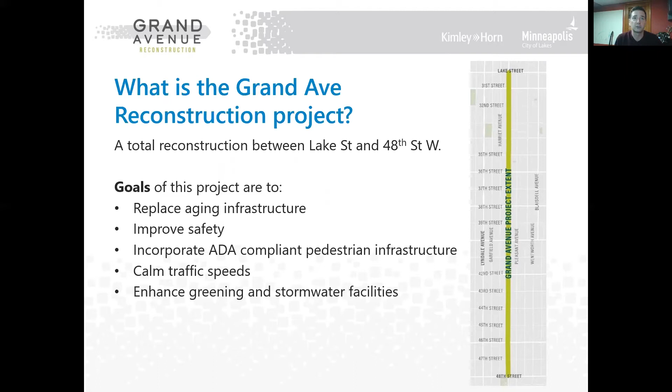But while we're there, we're hoping we can make Grand Avenue safer for all users. That means incorporating better sidewalks, better curb ramps to make the corridor easy to use for everybody, better managing traffic speeds. In addition, we're looking at what we can do to enhance greening, get more plantings out there, and better manage stormwater infrastructure.

So here you can see a project timeline. We're in spring 2020, right in the middle of the process, where we've gone through a couple of rounds of engagement. We've done some technical analysis, and now we're working on coming up with a recommended design layout. Footnote here is that our recommendation for our final layout has been postponed due to the COVID-19 crisis.

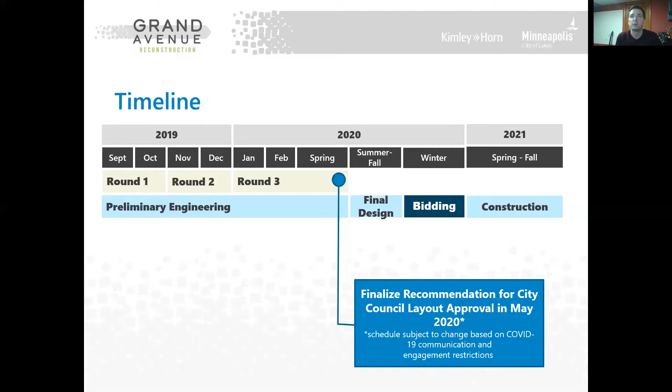The project is going to stay flexible during this time and make sure that we're allowing folks to comment and that people's voices are heard throughout this project. That said, the tentative project schedule is to move forward with final design in the summer, fall of 2020, moving towards construction in spring of 2021.

We've done some business meetings. We've met with some of the neighborhoods. We've done some stakeholder engagement with tables at community events. And we've had 2 rounds of public open houses that have happened so far.

What we're hearing is that multimodal safety and usability is really important. So that means not just the ability to drive along the corridor and park, but also the ability to ride the bus, the ability to walk safely and comfortably, and to ride a bike.

We're also hearing about the desire for more green space, more plantings, and better stormwater infrastructure along the corridor. And then finally, one of the key themes we're hearing is people don't want to expand the roadway. They want to stay within the existing right-of-way as much as we can.

So a little bit more on right-of-way. The point of this slide is to illustrate that today, the existing width of the street, from the outside of the sidewalk on one side, all the way across the street to the outside of the sidewalk on the other side, is 54 feet.

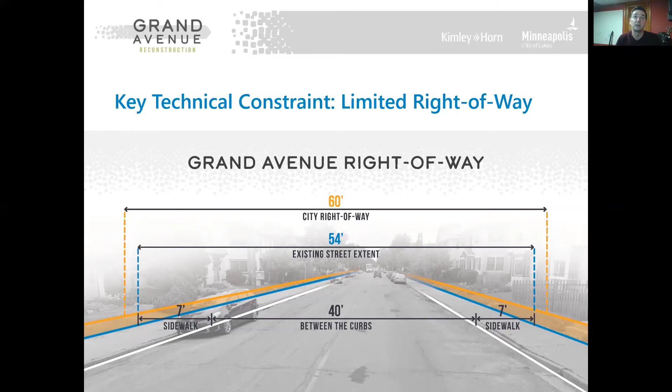Things like Access Minneapolis, the city's transportation plan, which guides implementation of transportation infrastructure and programs throughout the city. Vision Zero, an effort to reduce traffic incidents and crashes and get to zero traffic deaths. And complete street policy, which encourages consideration of all users on corridors that are up for reconstruction.

So what are some of the design elements we're considering for Grand Avenue? This slide will be hard to read on your screen, but that's okay because we're going to touch each of these squares in the table individually in the next several slides. On the top of this table you can see some of the design elements we're going to talk about next.

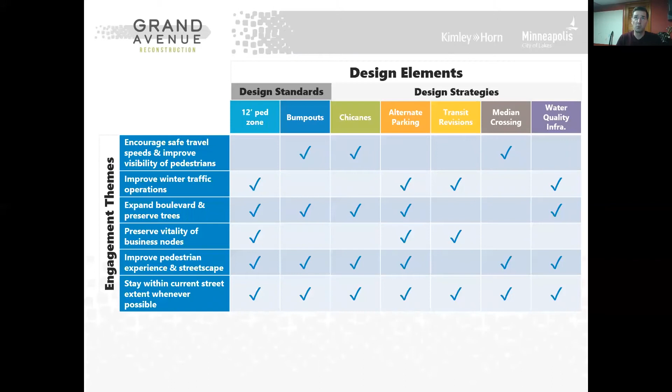On the side of the table, the row headings are the project goals and key engagement themes we're hearing from stakeholders. We really tried to make sure the design elements we're proposing solve some of the issues along the corridor. So with that, we're going to take some of these one by one and talk about them.

The first point to make in this project is that what's there today doesn't even meet our minimum standard for a pedestrian zone. In many cases there's a 6-foot sidewalk or even less with no boulevard today, so you've got a sidewalk, then a curb, and then the parking lane and moving cars right next to that curb. It's not even the minimum standard for a pedestrian zone.

So the first thing we're considering is bringing the corridor up to that minimum standard for the pedestrian zone, which includes a 6-foot wide sidewalk as well as a 6-foot wide boulevard along the entire corridor.

The benefit here is that it's going to make it more usable and safer for all users, for people walking and rolling along the corridor. It also provides the opportunity with the boulevards for increased green space, and gives you that buffer between the sidewalk and moving vehicles to enhance safety.

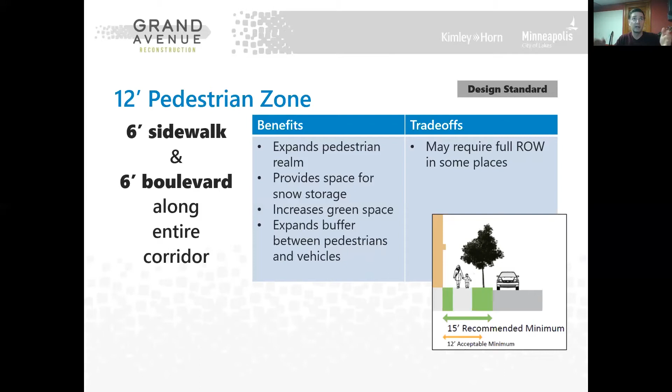The trade-off here is that in some cases this means we need to expand the roadway, which could require more right-of-way. I had that slide showing the existing 54 feet of roadway and the available 60 feet of right-of-way. So in some cases, in order to fit everything in, we might look at expanding the existing right-of-way. We're going to talk more about that in a bit.

Okay, intersections. Just like with the sidewalks and boulevards, we know intersections are critical for movement and safety of all users. Today we're not even meeting the minimum typical standard for pedestrian accommodations at most of the intersections along this corridor.

So the minimum standard or default treatment for intersections throughout the city in these types of areas is to use bump outs, also called curb extensions, which physically expand or bump out the sidewalk into the crossing, into the area that would be a parking lane, to shorten the crossing distance. This encourages safer vehicle travel speeds and creates a shorter crossing distance for people walking across the street. It can increase visibility so drivers can more clearly see people walking, and in some cases it can improve bus travel times.

The trade-off is it may reduce on-street parking capacity in some areas, since this bump out cuts into the parking lane, and it could restrict turning movements for larger vehicles. So if there are delivery trucks, we need to design the bump outs in such a way that we're not limiting the ability of trucks to get around the corners.

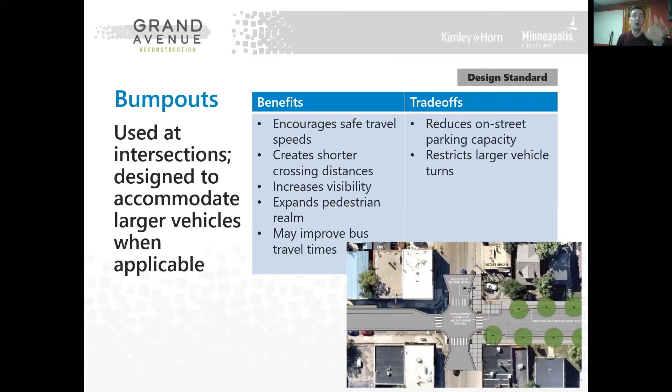Wider sidewalks, bump outs at intersections - these are kind of the minimum design standards that we feel we need to accommodate with this project. The next several slides will cover some of the design elements or strategies that could be considered throughout this corridor. These aren't necessarily minimum standards implemented everywhere, but tools we're considering to achieve project goals throughout the corridor.

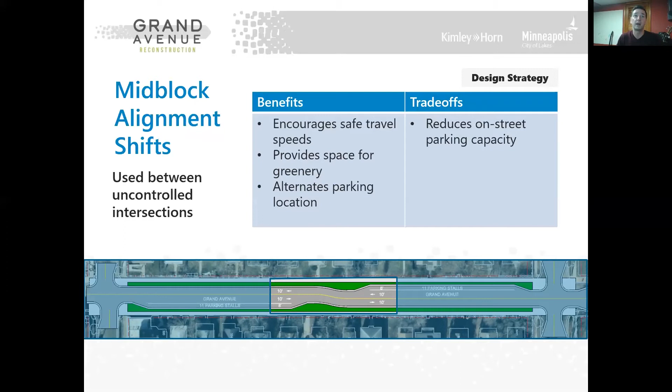The first tool is a mid-block alignment shift, also called a chicane. This is a tool we can use between uncontrolled intersections, stop signs or traffic signals, to encourage safer travel speeds. It also provides additional space within the corridor for plantings and greenery, and allows us to alternate parking from side to side for more space. The trade-off is that this alignment shift takes space in the road and could reduce on-street parking in some areas. This is a computer rendering - it's a wiggle in the road that helps encourage safer travel speed for vehicles, and provides additional space for planting, trees, and things like that.

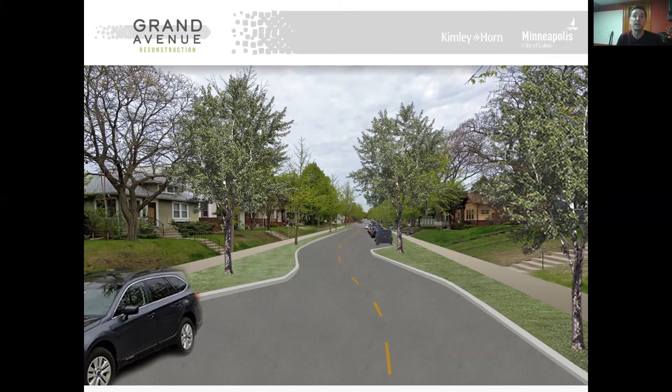This is another big strategy we're considering for this corridor. Think back to the slide showing the existing 54 feet of right-of-way versus the 60 feet we have available. In order to fit minimum design requirements - a standard sidewalk and minimum boulevard width - we've got to create room. That could mean expanding to the full 60 feet of right-of-way in some areas, or finding the room somewhere else.

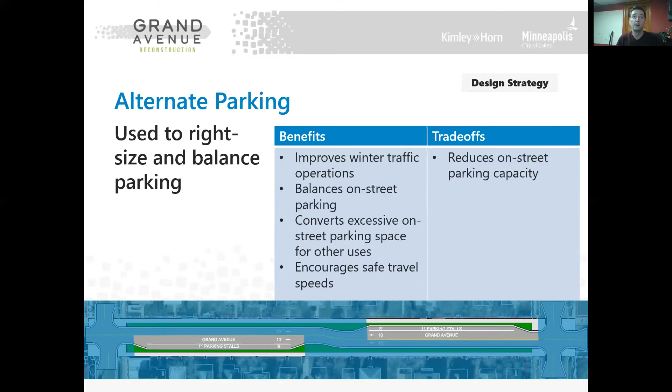One tool we're considering for areas where we can't expand the right-of-way is to limit parking to one side of the street only, then alternate that parking so it happens on both sides of the street. That provides the extra room to fit in everything we need. It also improves winter operations so a plow can clear the curb line quickly when it snows. The trade-off again is that it could reduce on-street parking.

Transit revisions - we want to touch on this quickly. There are currently bus routes along this corridor, with stops generally every block. We're looking at certain locations with low ridership, the quieter bus stops, for consolidation - in other words, to eliminate some bus stops along the corridor. This provides space, giving us additional capacity for things like on-street parking and bump outs at intersections. It also leads to faster transit operation because the bus makes fewer stops. The trade-off is those who use those stops today would have to walk a block farther to reach a remaining transit stop.

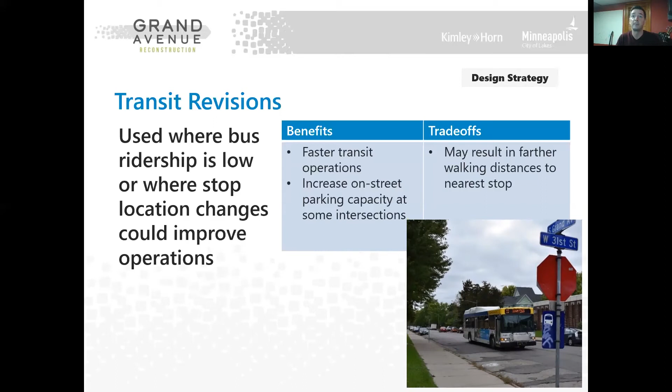Another tool in the toolbox we can consider at intersections is median crossings. A median crossing is a raised concrete median in the middle of the intersection. This improves safety for cyclists and pedestrians walking across the street by limiting the ability of vehicles to make a turn. A vehicle is physically prevented by the median from making a left turn, which eliminates the conflict point or potential for a crash with a pedestrian or cyclist. The trade-off is that it would prevent vehicles from making turns where this is implemented.

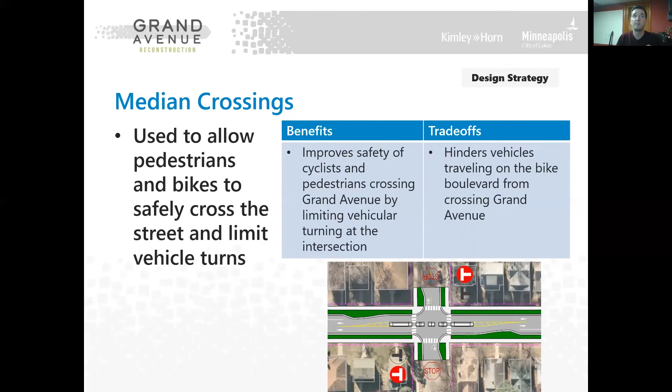Finally, one of the tools in the toolbox is ways to increase water quality infrastructure - things like rain gardens or infiltration, as shown in the picture, to help remove pollutants from stormwater and improve the quality of stormwater that makes it into our lakes and streams. This is something we're considering where it makes sense along the corridor. The trade-offs are that it requires some additional periodic maintenance, and it requires space like a bump out in a boulevard, which could further limit on-street parking capacity.

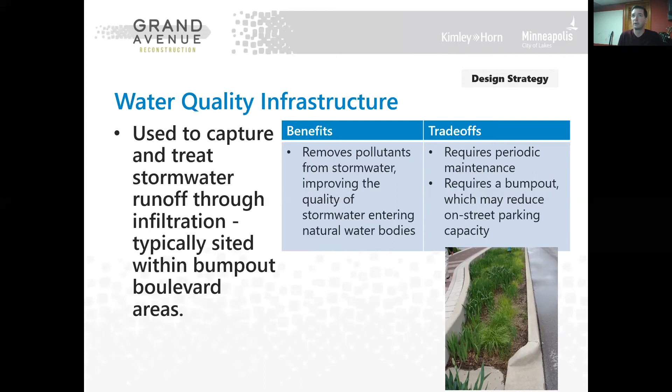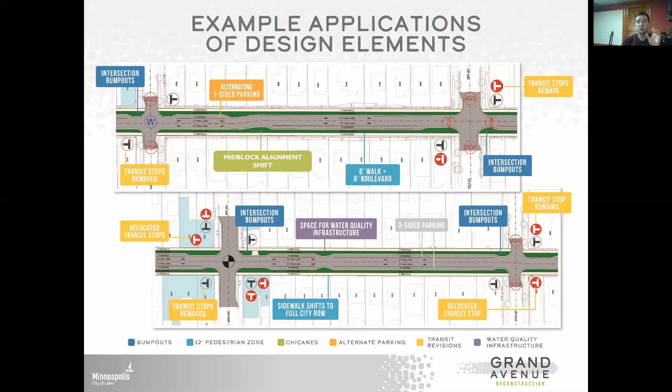Here we're going to talk about what this all looks like on Grand Avenue, what's the proposed design. This is an illustration of what the layout looks like and what you can expect to see. It's a top-down view of Grand Avenue showing the design in terms of sidewalks, boulevards, bump outs, chicanes or alignment shifts, as well as the vehicle travel lanes and parking. This is just a representative example of what this looks like.

Now I want to touch on some frequently asked questions. I know there's a lot of conversation about this project and a lot of questions out there. Here are some responses to some of the most frequent questions that we hear.

One of the big questions we get is what's the proposal for on-street parking along Grand Avenue. Given the right-of-way constraints, there are going to be some areas where we're proposing limiting parking to just one side of the street.

Again, looking back a few slides, we have the link to the project layout. If you go look at the project layout, you can see this illustrated on a map to better understand what's going on with parking. Another question we're getting is why can't the city widen the street to keep parking on both sides and get that minimum sidewalk location?

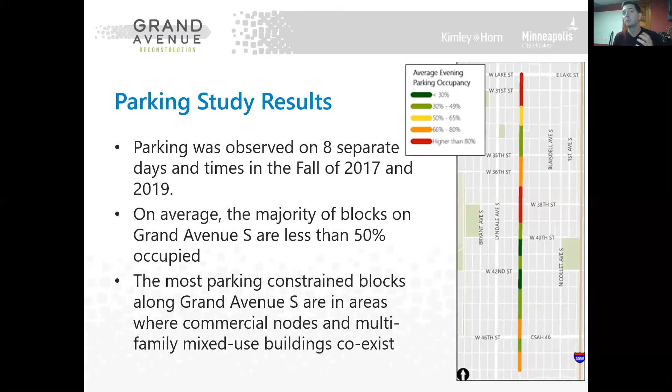Okay, so now we're going to move past parking and just quickly touch on a few additional frequently asked questions.

The assessment rate is set annually and it's a fixed rate—the same for everybody. You can find more information about that on the city's assessment website.

We already touched on this a little bit, but a question we always get is, are bike facilities being proposed along the corridor? The answer is no. However, there is one exception: along Grand Avenue from 31st Street to Lake Street. So that very northernmost one block of the project, we are proposing to include bike facilities. The reason is because there's a planned future bikeway along Pleasant Avenue, one block to the east of Grand Avenue.

On Pleasant Avenue, there is no traffic signal at Lake Street, which is a busy road. So in order to allow the future planned bikeway to cross Lake Street at a traffic signal, we're proposing to jog it over at Grand Avenue and cross at Grand. That also provides the added benefit of providing a direct connection to Whittier Elementary School as well as Washburn High School.